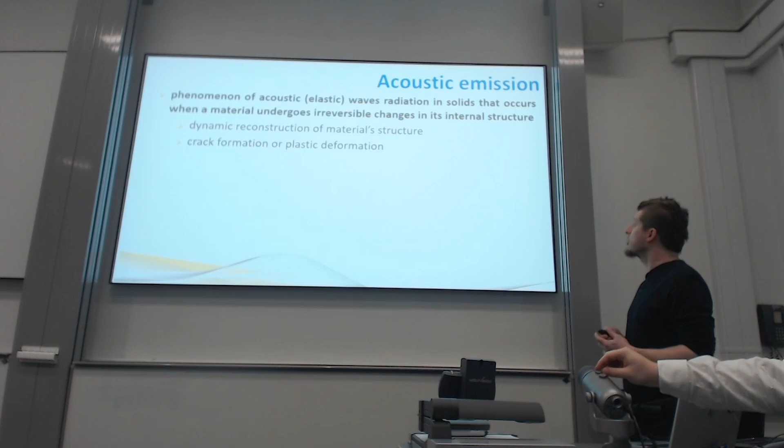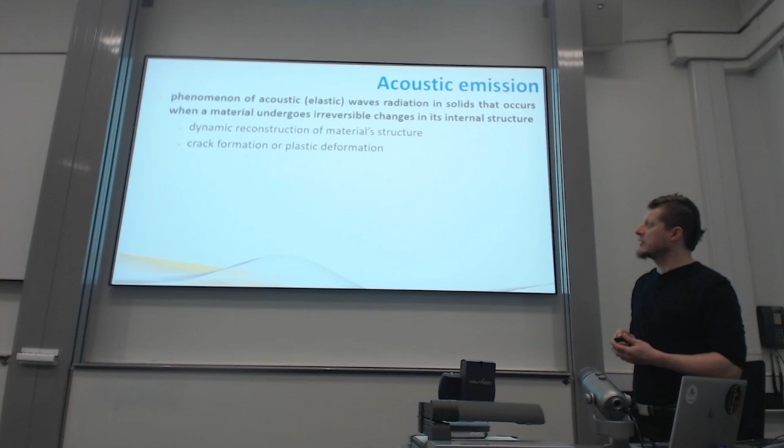Some theory. Acoustic emission is a phenomenon of acoustic wave radiation in solids that occurs when a material undergoes irreversible changes in its internal structure. That can be some dynamic reconstruction of material structure, some plastic deformation, dislocation movement, or some cracks which are much more hearable. Because actually it's a sound. It's a sound just not hearable by a human ear. It's just sound detectable by some electronic elements.

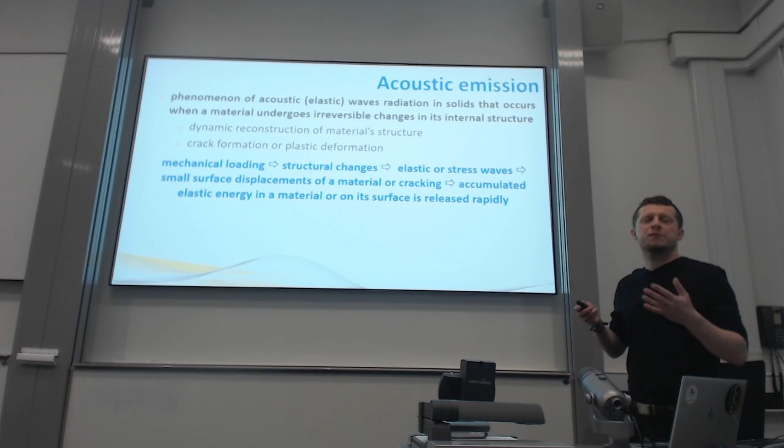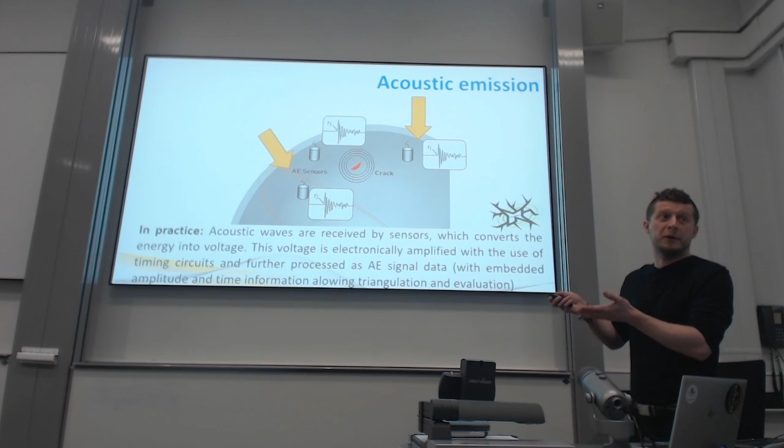You have some mechanical loading that creates some structural changes, and the small displacement is detected by different types of sensors. In practice, this is how it's done. In macro scale, you have some volume, probably pipelines or something similar, and you have some sensors. Acoustic waves, created probably by some crack, are received by the sensors, and the sensors convert them into voltage, which is amplified and further processed. You can even have triangulation of where it happened, so it is important. It can give you amplitude, time, and direction where it happened.

The company we have worked with is Dakel, a Czech-based company, which uses it as a non-destructive testing method for integrity of pressure vessels, and their main job is integrity of pipelines in nuclear reactors. So it's a very important technology for our safety in the Czech Republic. They are cooperating with Czech Republic and Slovakia plants, not only the big nuclear plants, but also other types of less developed plants.

So what was our modification? To create sensors with lower noise, higher sensitivity, and easy to use. My point is to make a sensor which is applicable to any environment. We are using it with the Micro Materials NanoTest P3, but it can be used standalone, or in any other system. This is how the final product looks, patented and created by the company along with us and tested.

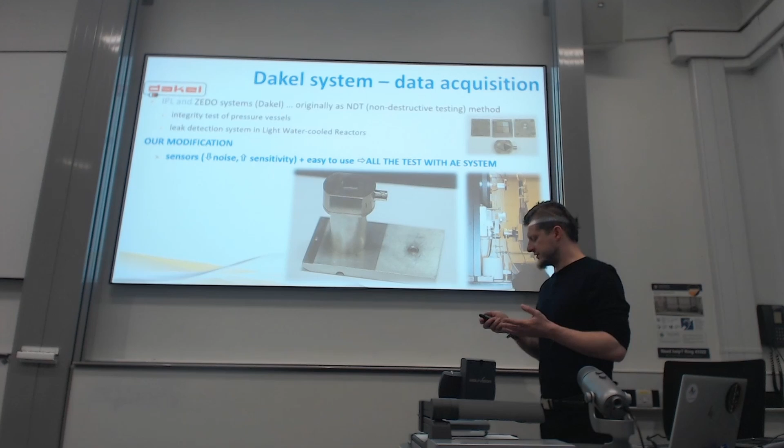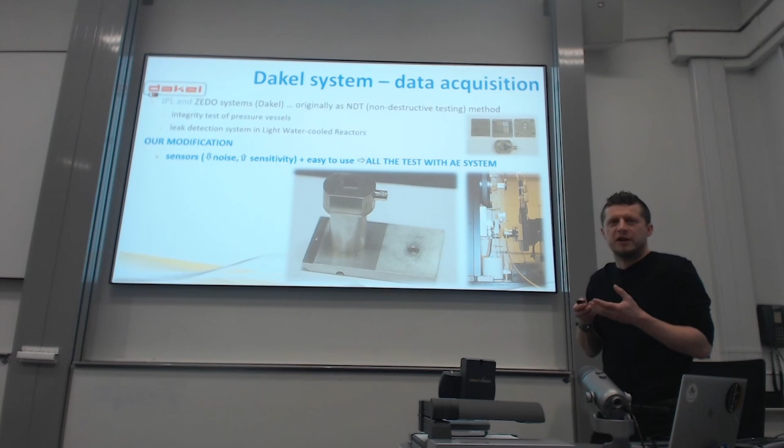If you want to analyze the acoustic emission during some local mechanical tests, you generally have two approaches. You attach the sensor close to the sample with some glue or something, or you can attach the acoustic sensor to the indenter, because you want to be as close as possible to the source of acoustic emission. The thing is that the acoustic signal can be dampened through the interfaces between the source and the sensor. But we have this product which is quite handy, because it's a normal holder and not much bigger, or even smaller than the standard Micro Materials holder.

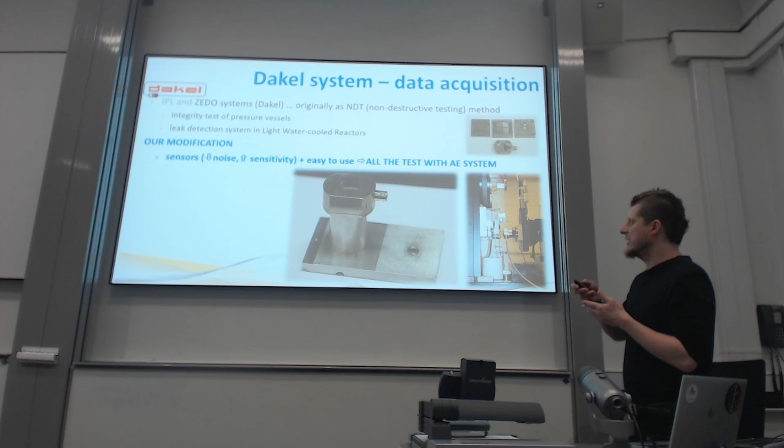It's a little thicker, and we are using it nearly on every measurement as a standard tool. Applying wax, heating it to high temperature, and attaching our own samples. So the sample can be detached and used further. This is how the holder looks. This is how it looks in combination with the P3 system.

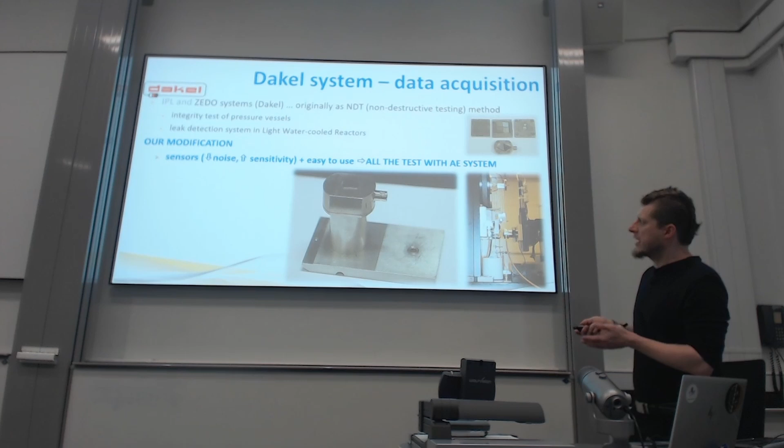There's some cable, and you can ask, okay, but it's a big bulky thing, maybe it's dampening the signal. It can, but not so much. This is probably the biggest sample we have measured. Some metallic stuff, like 2 centimeters, with chromium nitride and titanium nitride coatings combined. So actually there are several interfaces. This is like 4 multilayers, then the quite thick metal and the wax, then the metallic part, and the sensor is inside.

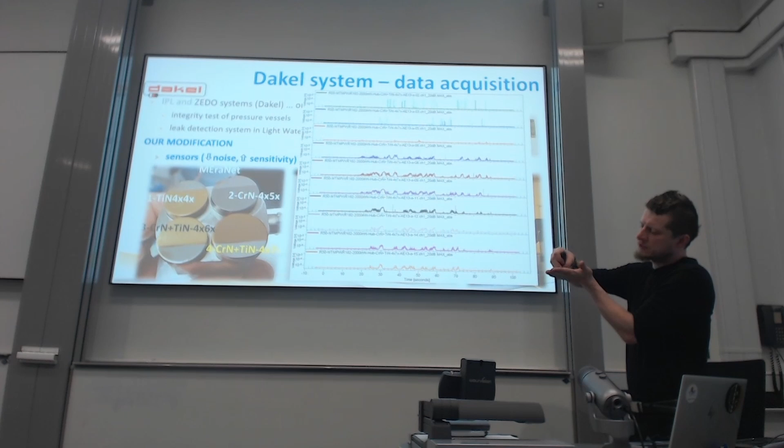And these are the results. As Ben told yesterday about multipass wear tests, several scratches at subcritical load, checking when something happens. It's like a sped-up wear test. So in the first scratch, we had a nice signal from the first plowing, because there is much more contact of the tip with the coating, and then there is less contact because it's already plastically deformed.

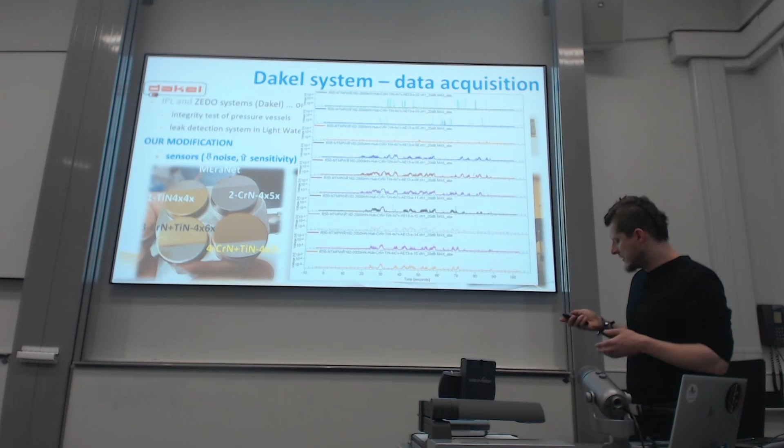And you see in the fourth loaded scratch, something happened. We can see there is a deterioration of the coating, which increases in every other step. So it's not that something happened here and nothing is happening afterwards, but it's still on the same spot, a little more broken and cracking. So our philosophy is to do continuous recording during all experiments and hit detection. I will explain what I mean by this later.

It can create a large amount of data, so we wanted to handle this, because after one day it can create nearly hundreds of gigabytes, which is not easy to handle. So what we did is take the signal from the NanoTest itself.

It can give you a signal, and we are using it as a starting point and closing point. So then we have just a very specific measurement during just the test. Here are some electronic parameters we are using: sampling frequency, 10 megahertz, it's changeable, and the bandwidth, 50 kilohertz to 1500 kilohertz, because we want just the important thing, just the acoustic emission from the material, not noise around. So we need to cut it. And definitely we need some amplification.

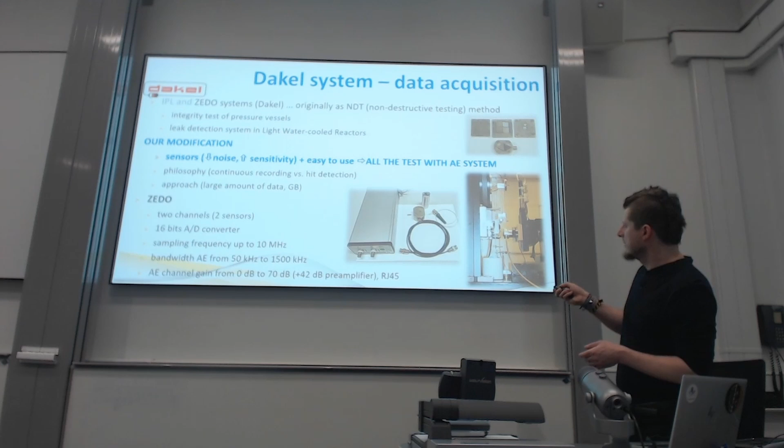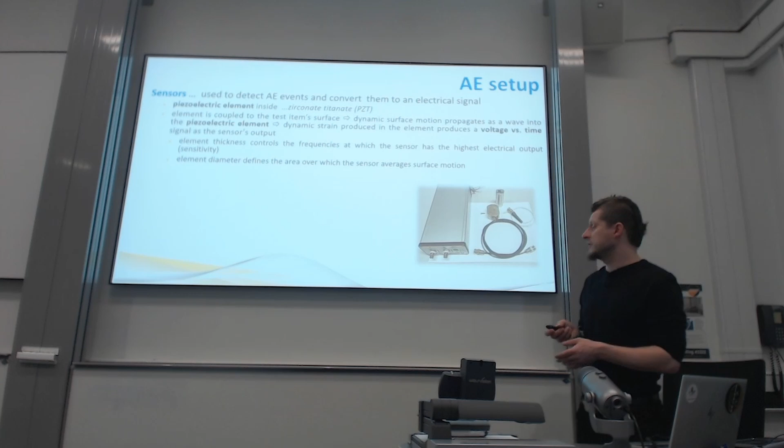This is how the whole system looks like: a holder, cable, and just a unit that takes the data, and computer. Some more technicalities. Most important is that we are using a piezoelectric element inside, lead zirconate titanate. We have used several types. It was a part of our research. We had one big, one segmented, two smaller. So we tried a lot.

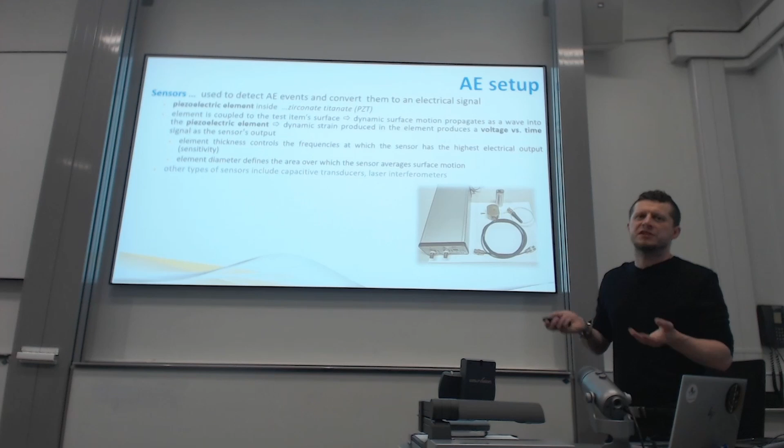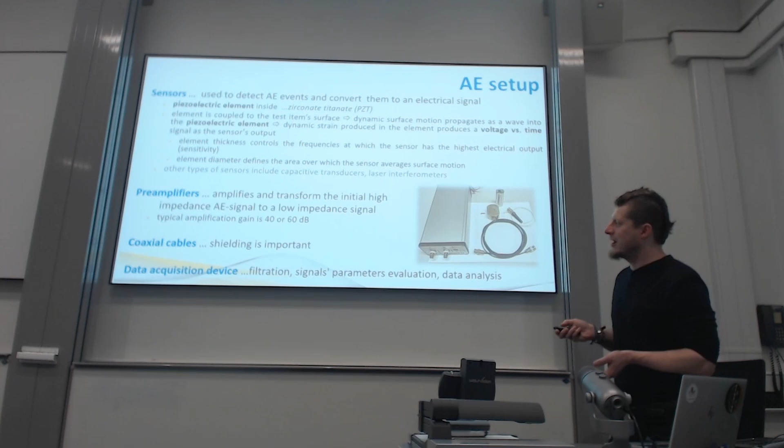Actually we have like 10 holders, a little different. So when we have some measurements, we are just using one holder for one project to not mix the results. But we have elements with different sensitivities. Generally, in practice, you can use capacitive transducers, laser interferometers, but we are using this approach, piezoelectric element. Definitely, we need to preamplify it to have some reasonable data. And very important is shielding. We are using coaxial cables with higher grade.

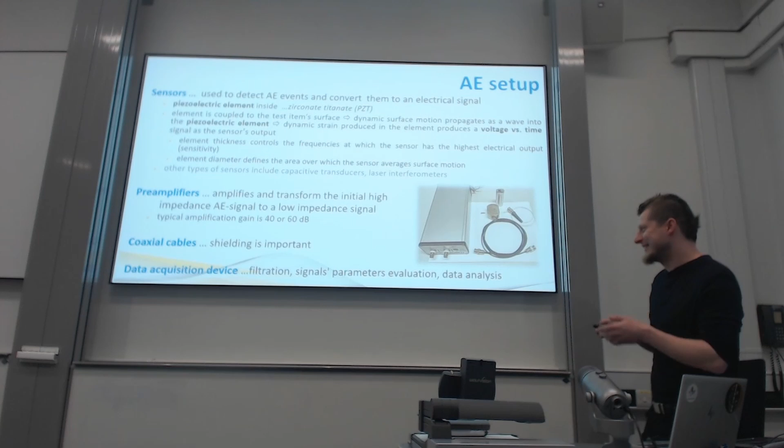Once, there was a guy with a Samsung Galaxy S7 mobile phone. He just came to our laboratory and we had a super signal from acoustic emission. I don't know why. And no other mobile had done it. I have done experiments, but yeah, this one has done it. So we need some shielding, which is very important.

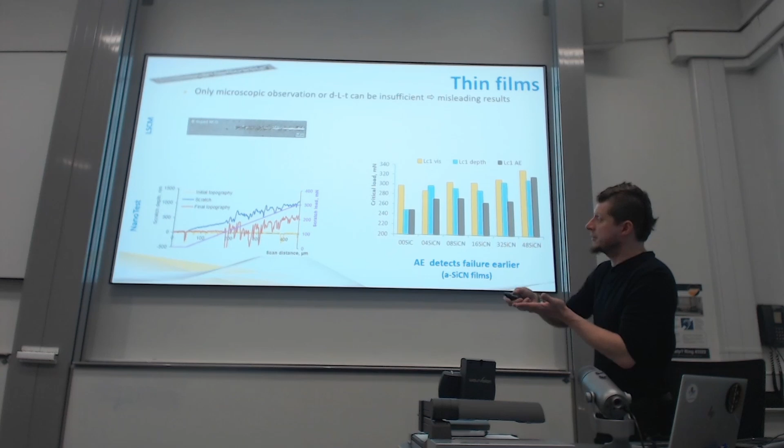Okay, so let's check some results. In the, let's say, simplest case scenario, it can be used as another method for a scratch test. This is a typical scratch topography, progressive load scratch test. Here we have initial topography, just scanning the surface, loaded scratch, where something begins to happen here, and final topography that scans the rough surface. You can see here, okay, it's nicely aligned. We can use these two methods, or we can use acoustic emission, nicely aligned.

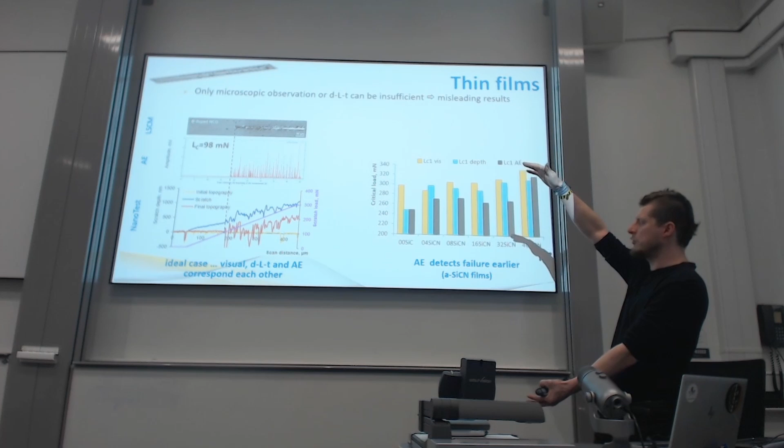So you would say, okay, why would I need it? I have this information here, but as you can see, we can use it as a standalone. You don't have time for looking using a microscope. It takes time, so you can use just depth change from the Micro Materials system itself, or you can use acoustic emission. As you noticed in the first picture, where I have several of these acoustic emission records, in our software we can place several acoustic records and compare them at one moment. So it's quite quick.

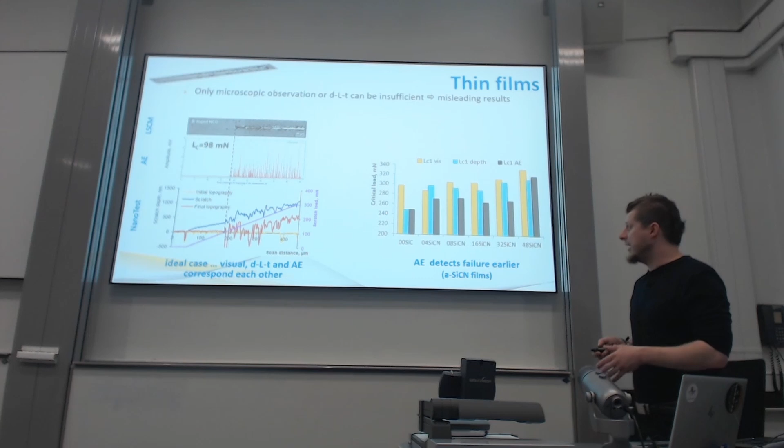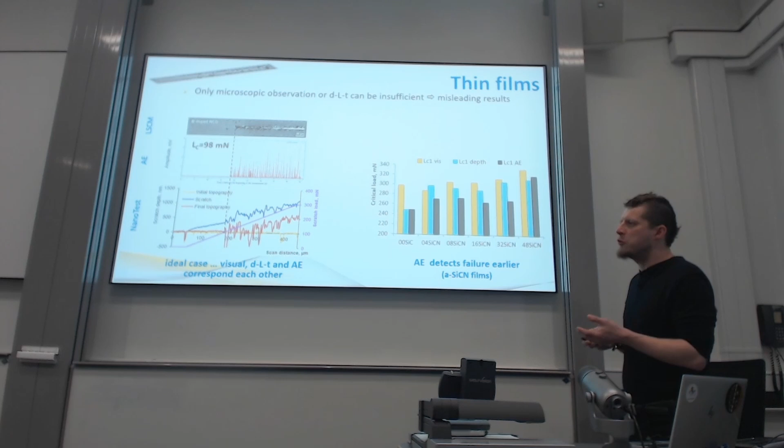But in most cases, acoustic emission detects failure earlier. These are several coatings. I will show more of these tests. It was my dissertation thesis, silicon carbon nitride, annealed at 600, 900, in vacuum and in air, and acoustic emission tends to be quickest. It was just one type of critical load, the first cracking occurrence, but acoustic emission tends to be quickest in the detection, which means somehow we didn't see through the microscope image what was really happening.

This is how it looks in advanced mode, because what I showed you until now is just a record of the acoustic emission signal. We call it envelope, because actually this bit is created by one hit. Something happens, and there is a signal, and this is the signal in 250 microseconds. So this is how a hit looks, and the hit is perceived as one line, but you can see they can be coupled together. But you have information not just about this, but even about the hit, and this hit is specified.

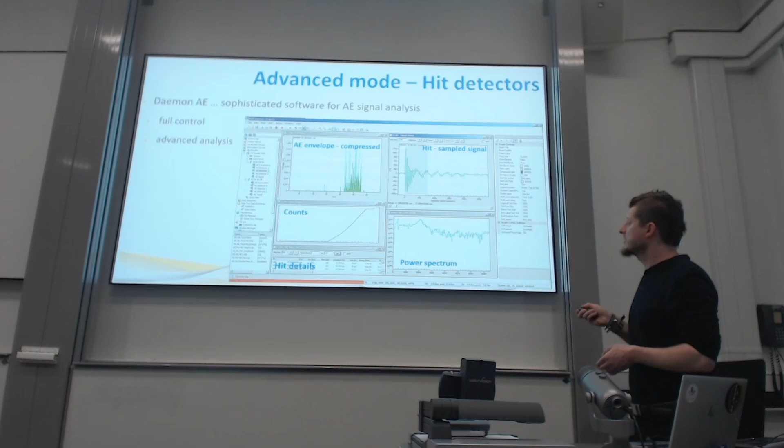You have some amplitude threshold, you have, let's say, the length of the hit, and everything is set up so you can take out some bad hits you don't like. You can just set up what you need to detect. So some small hits can be taken out, or you can make it more sensitive. We have some counts, which is something like a hit, but it's just an amplitude threshold, and this counts how many times thresholds were surpassed. And we can also do spectrum analysis of the hit itself. We hope there is some information in this.

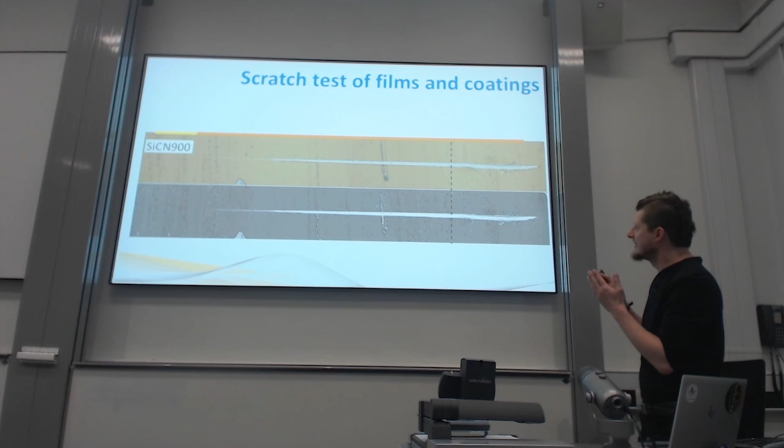So okay, let's look again at two more tricky scratch tests. Here you can see a scratch test of silicon carbon nitride annealed at 900 degrees. You would assess, probably, there's a critical load, something here. We have used confocal imaging, and maybe you would say, okay, it's here. But actually, it was a little away, it was here, because acoustic emission, I would say, heard it sooner. As I said, it was part of my dissertation, so I did a lot of work on it. And we have used, let's say, digging using focused ion beam.

So focused ion beam was cutting into the samples and created a cross-section. And we have noticed that at the very beginning there are some interface cracks which didn't go up to the surface. So nothing could be, at that point, visible on the surface. Also not in the depth change record, because this doesn't change the depth rapidly.

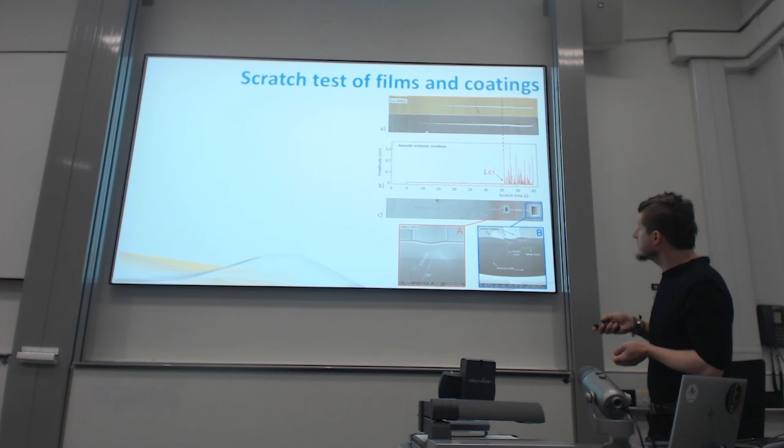At the latest part, there's big cracking going up to the surface, but from the cross-section it looks so nice. So in this moment it helped, because you want to detect the first critical load. This is it, not this. So it can be helpful in more ductile coatings. Let's say a brittle coating would break instantly. You would have it in a microscopic image, you would have it in depth change, but more ductile ones are detectable preferably by acoustic emission.

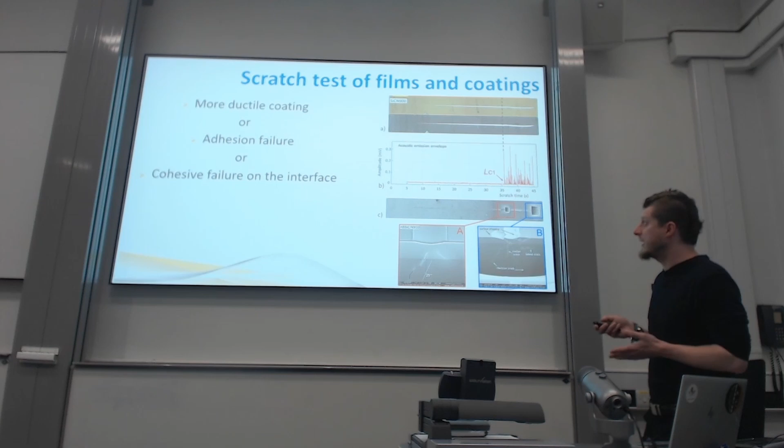Or adhesion failure. What is a scratch test? Oh, it's not an adhesion test. We would like to have it as an adhesion test, but you can, with a combination of other methods or a lot of experience and one instrumental help, detect it as a pure adhesion failure. Because if you don't see it on the surface, it can be the adhesion failure.

There are some three small little cracks that are probably, again, some subsurface cracking. And as they are nicely aligned with some frequency, it's probably real data, not noise or something. Also, I have it in my two articles, so if you want, make a photo and read more.

But let's get back to acoustic emission. Visually, nothing happening here. In vacuum there is no tribolayer, so we were looking at what would happen. In depth change, I don't know if I would be brave enough to say something is happening here, but acoustic emission heard this. So again, you can find these articles there. And if you want several more of these scratches and images, I have it in my dissertation here, so I can give you like two hours of reading.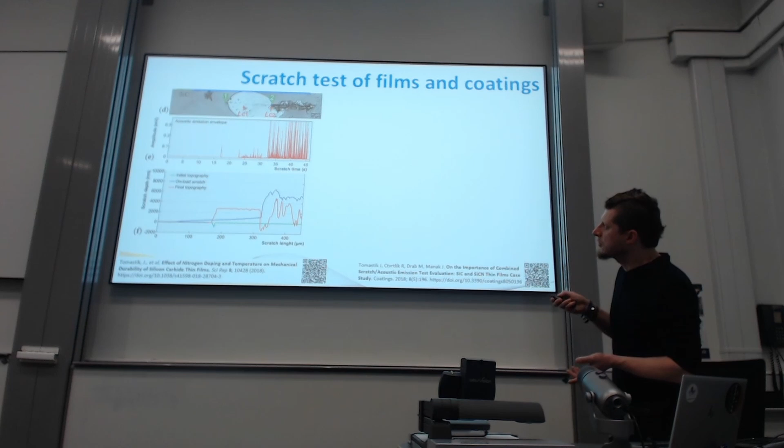But here you can see, so what happened actually? There was some debris, it broke, and then the spallation occurred from that point backwards, because the final topography shows the spallated or delaminated substrate. So this is what happened. Actually, the first critical load occurred in this moment, where there is substrate cracking. And you can also use the advanced method to analyze the hit shape and spectra. So this is what can be helpful.

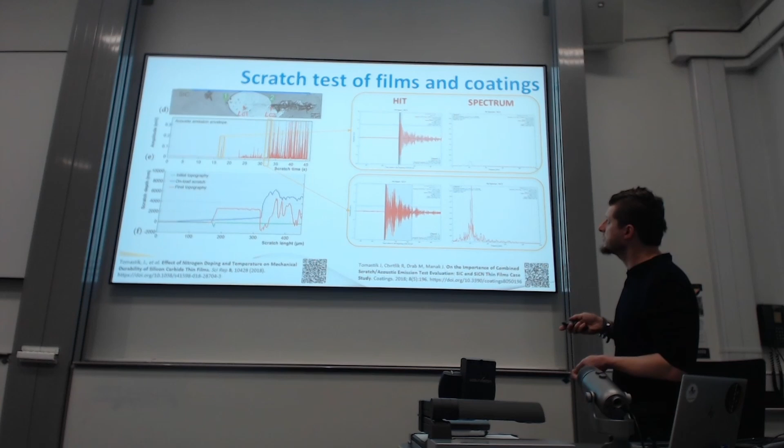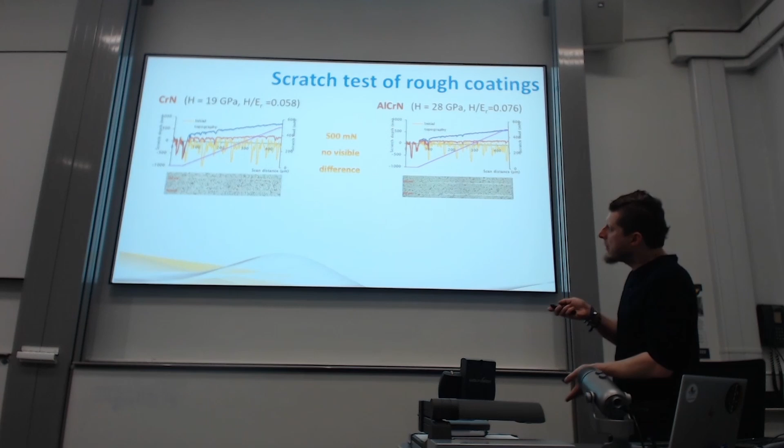And more cracks: two quite rough scratch tests that cannot be distinguished using visual observation and depth change record, but acoustic emission gave some differences. There is more signal in chromium nitride than in the second sample. Some concrete, only the portlandite phase of a concrete gave some acoustic emission, others not.

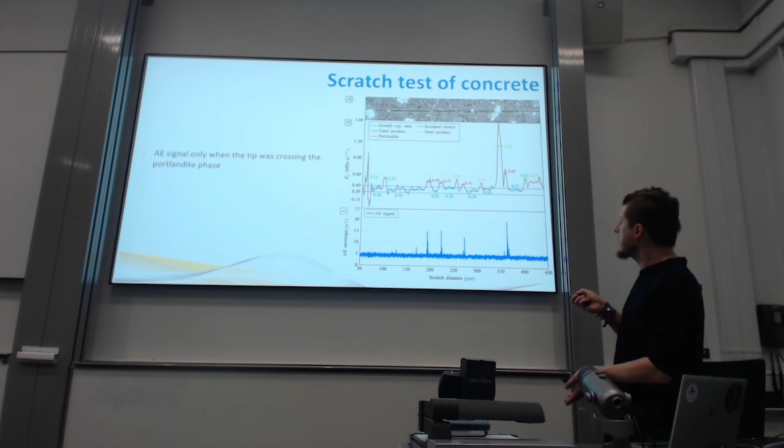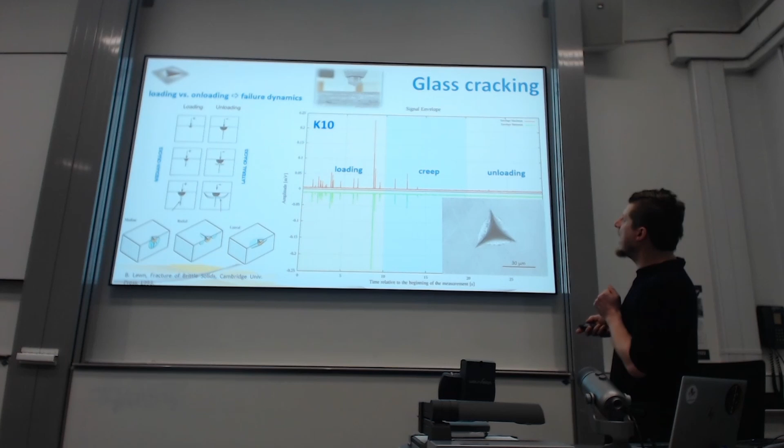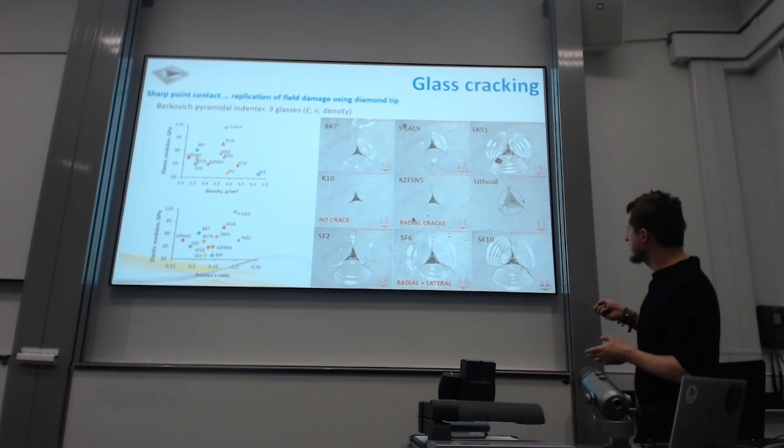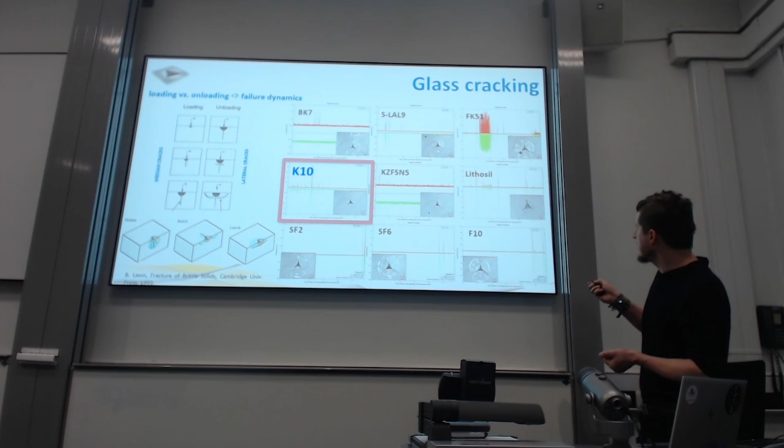In this K10 glass, we have this thing happening. What we did was use several more glasses, because our department is a department of optics. We generally create optical instruments, telescopes. So we wanted to test how brittle they are, how they can crack, because these telescopes are out in the open. So this is what happened: several different types of cracking of several different glasses, and acoustic emission. You can see there are a lot of differences. This glass actually created an acoustic burst and a lot of acoustic emission during unloading, so probably lateral cracking, and here also. So it can give you nice information, even if it doesn't look so distinguishable.

Several times we have made measurements for Şişecam, a big Turkish company that creates something like Gorilla Glass. So we also tested this Gorilla Glass.

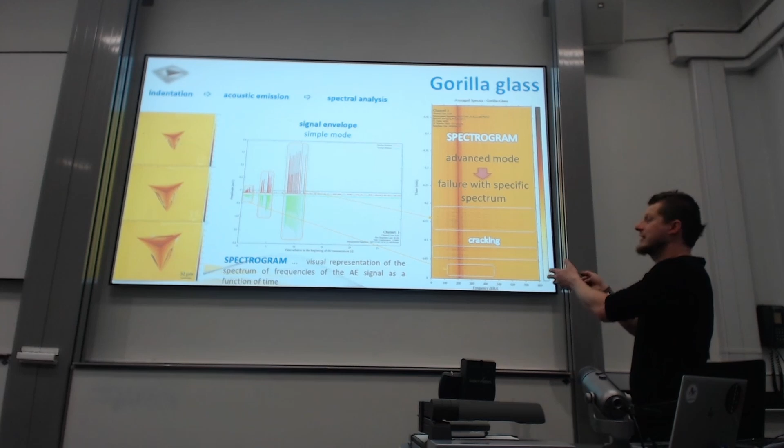So let's say one last image from me from indentation. This is a more advanced type of output that we can have from our system. It's actually a 3D graph. We have indentation, some cracking in the loading phase, none in creep and none in the unloading phase. And what you can see here is a time record of the whole test, from here to here. Frequency, so it's a spectrogram. We analyzed each hit and have a frequency, and the color means counts in that frequency. So you can see these hits in this spectrum. I don't think it's much of a scientific record. It's more like a nice record that can be placed in some publication. I just prefer the standard and frequency.

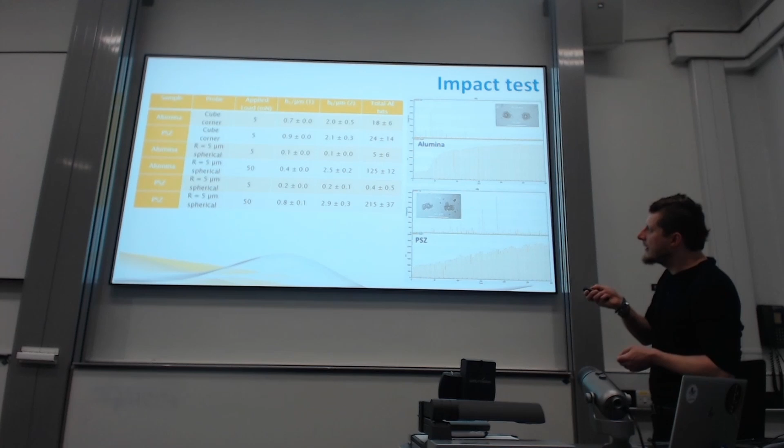We also tested it in an impact test. You would guess, okay, impact test, too loud, too much sound around. But we had some differences in comparison between alumina and the PSZ sample. I probably forgot what it is. It's in the book of Tomáštík and Winbeek. Everything is there. So we can have differences even in this impact test.

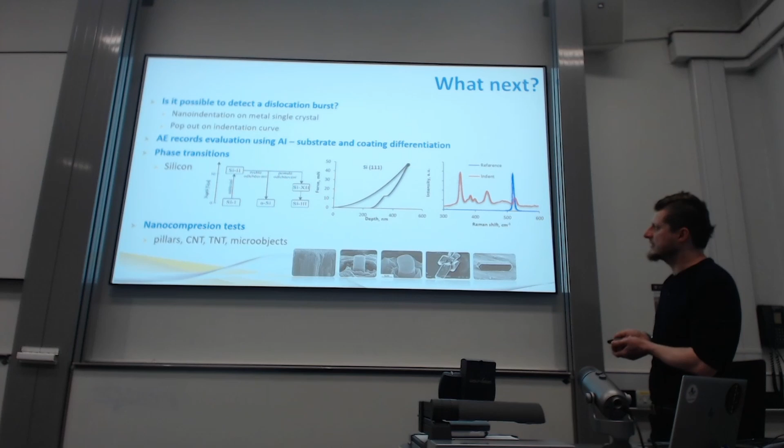The Goldilocks thing would be to find cohesive cracking and adhesion cracking of a coating from a substrate, and somehow find it in the data, in the spectra, in the hit shape. So this is what we plan to do if there are more people. So maybe if you have some nice students and you want to send them for some practice, we are open to taking them into this research. In future, we plan to buy an in situ indenter, and we will probably look at nanopillars, micro-object testing with acoustic emission. So we will see how it looks.

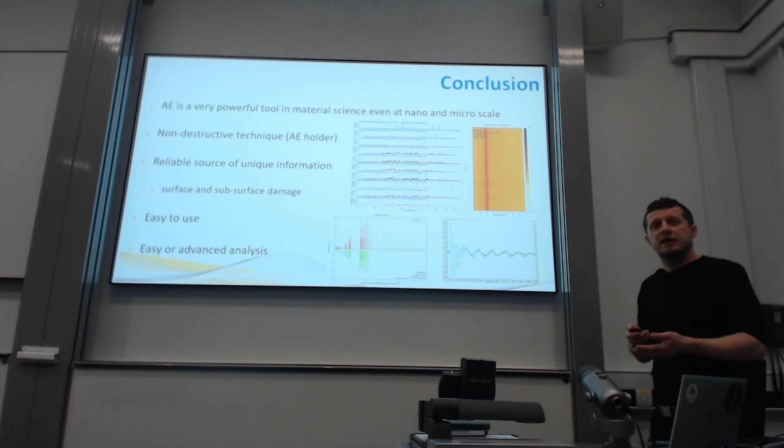So in the end, acoustic emission is a powerful tool, standalone or in combination as a multiple sensor approach, that can be used for different types of coating. Not for all of them, very ductile samples cannot be measured, because ductile samples do not produce acoustic emission, but it can give you mainly damaged subsurface information, which is definitely important for surface and local mechanical properties.